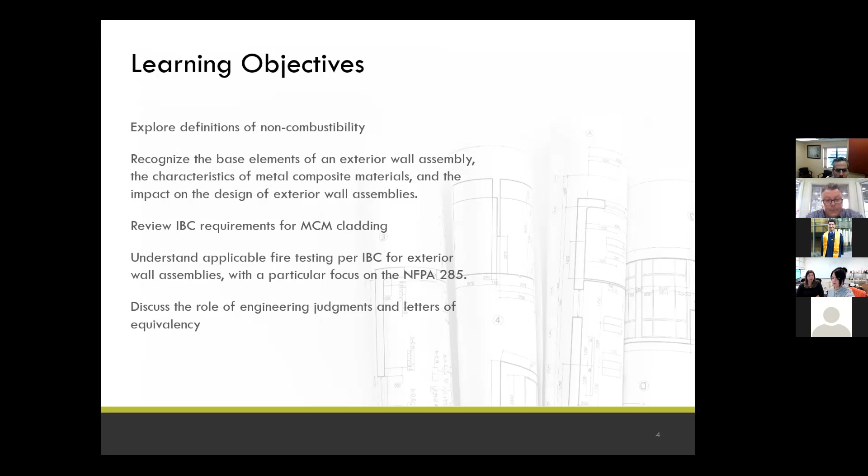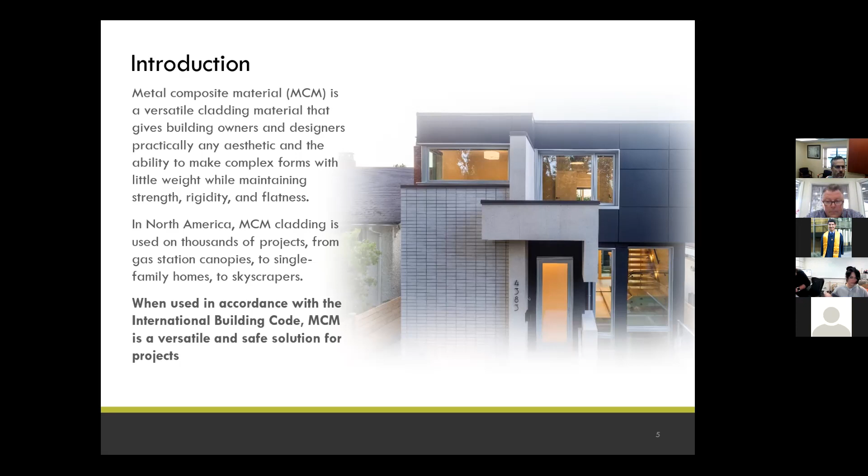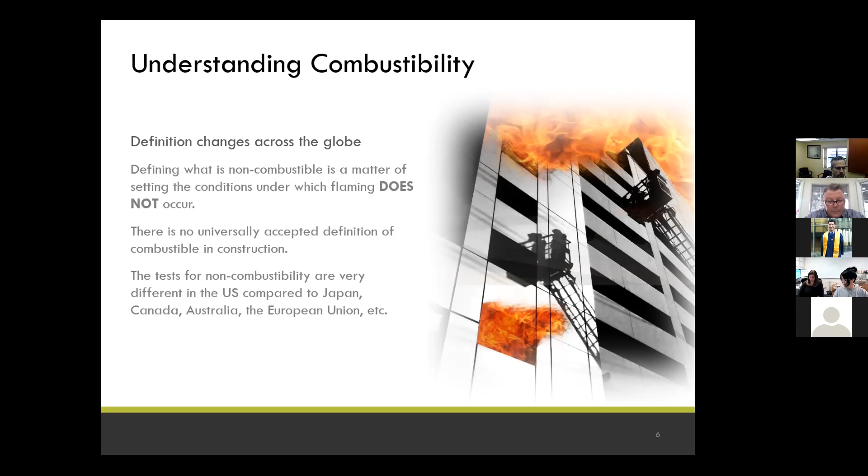So here in the US, like I said, we define non-combustibility, we define which flaming does not occur. The definition of non-combustible changes from country to country—this is very important to remember. Our building codes here in the US are much different than those of our friends up in Canada, the European Union, Australia, Japan, and so on.

So what is combustibility? Combustibility is about flaming, mass loss, and temperature rise. Non-combustibility is defined as less than 50% mass loss, less than 54 degrees Fahrenheit temperature increase, and no flaming beyond the first 30 seconds. If your material meets them, then it is non-combustible. There are a few tests, including the ASTM E136 test, which is done in a vertical oven at 750 degrees centigrade.

The same oven is used in Canada. A combustible material in the US can be classified as non-combustible in Canada, or vice versa. So that's something very important to note - something can be classified as non-combustible in Canada, but combustible here in the US. US and Canada set limits on these criteria and use that to determine what is non-combustible material.

Now, non-combustibility, as we read here in the US International Building Code, test ASTM E136, considers the material non-combustible if it has less than 50% mass loss, a temperature increase of less than 54 degrees with no flaming beyond the first 30 seconds, in an oven set to 750 degrees centigrade.

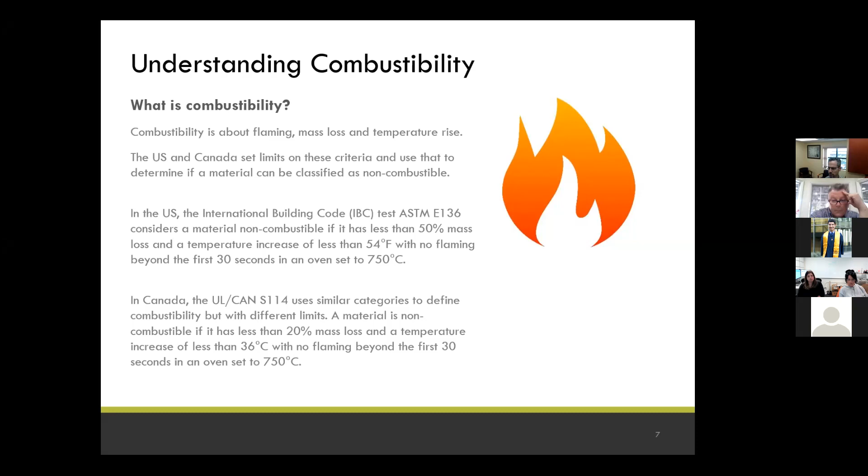And then our friends up in Canada have their own test and their own limits. Now, if the final product is a composite, which we're talking about, all materials must be tested separately and pass. In the case of MCM, it includes the skin, the core, and adhesives if used.

Obviously we don't use any adhesives at ALPOLIC, but some manufacturers out there do. Now, what is MCM? MCM is metal composite material. In that MCM realm you have your ACM, your TCM, your CCM, your ZCM - zinc composite, stainless steel composite. How is it produced?

For those of you who are unaware, it's produced by the continuous bonding of two of the same or similar metal skins under heat, pressure, and tension to either side of a thermoplastic core. This thermoplastic core allows for the uniform expansion and contraction of both metal skins, ensuring thermal stability, keeping the material very flat, and ensuring product performance.

So there are some really important words in this first paragraph. The first one is continuous bonding. This allows for the same consistent pressure, heat, tension, and paint when we are manufacturing the material. So continuous - very important - bonded under heat, pressure, and tension.

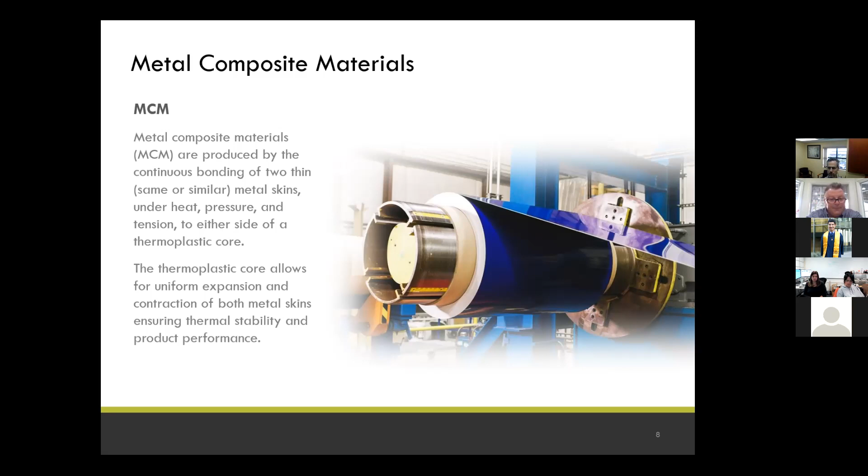This is going to ensure that the skins, whether it's aluminum, titanium, copper, zinc, or stainless steel, are bonded tight to the core. You're not going to have any delamination, no oil canning, and whatnot. And then the thermoplastic core - this is the most important part here - it keeps the material very, very flat, as we all know.

Now, as I just talked about, in that MCM realm you have your stainless, titanium, copper, zinc. It offers rigidity, superior flatness, and thermal stability of heavy gauge sheet metal. And we'll see too in our AIA #1 presentation, we have a little diagram - it's over 61% lighter than solid heavy gauge sheet metal. 4 mm material has excellent strength to weight ratio, is pre-finished, flexible, lightweight, can be prefabricated or curved, used on all different sorts of material.

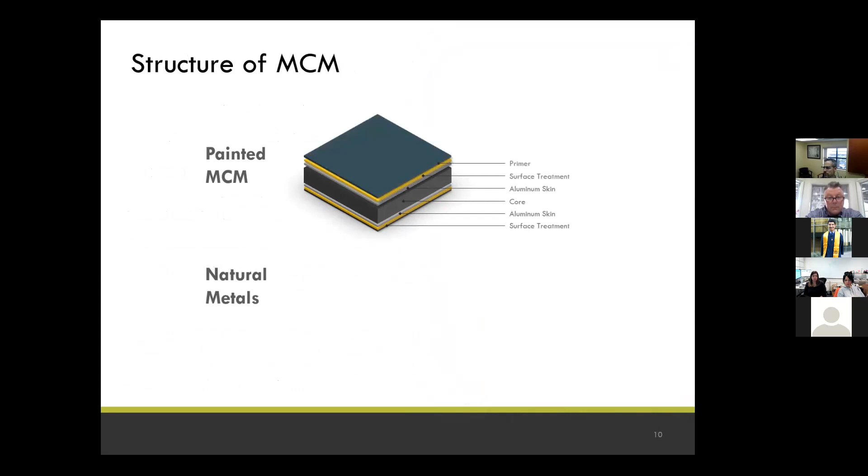Here's the structure of MCM. I'll quickly go over this. Your painted MCM has a surface treatment, aluminum skins bonded to that core, surface treatment on top, primer, color coat, and clear coat if needed. And then natural metals - there is no finish on natural metals, so there's not going to be a finished warranty. It's just the natural metals bonded to that core.

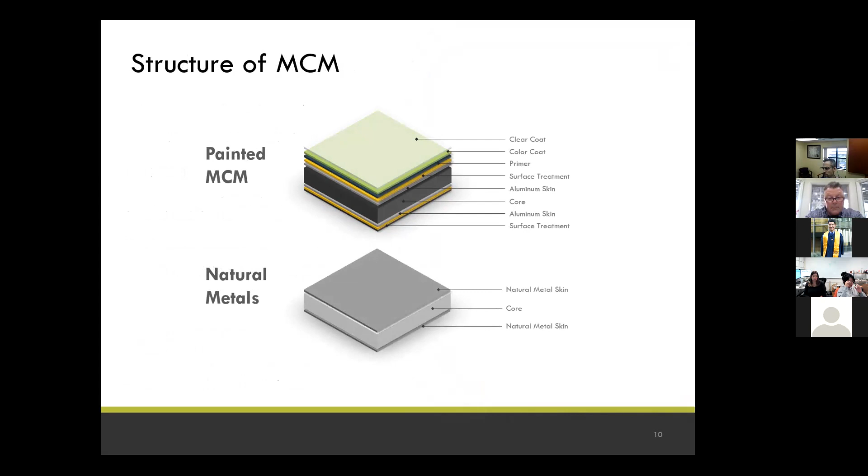Now, the types of cores. Very important to note, there are two different types of cores available in the industry: PE core, polyethylene core, and FR core, fire resistant, fire retardant core. Now, as we read here, both cores are regulated by the IBC and can be rated Class A under the ASTM E84 and Canada's ULC S102 test.

PE is roughly 2/3 the weight of FR per IBC. PE can be used on an elevation below 40 feet. FR must be used on anything 40 feet or above. I know at Walters and Wolf we love FR core, try to stay away from PE core, so that's perfectly fine. Now, FR material has been used as a component in wall assemblies that have successfully passed the NFPA 285 and Canada's ULC S134 test. Basically, the FR core is achieved by adding a high percentage of mineral fill.

The FR core suppresses fire by releasing steam from its water-based, mineral-filled core - basically the ATH, aluminum trihydroxide. And let's follow the code: anything above 40 feet, FR core must be used, and PE core can be used on elevations below 40 feet.

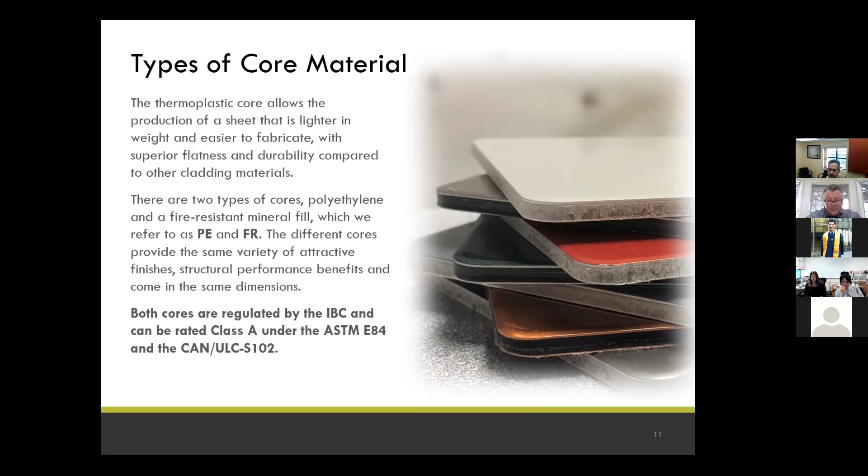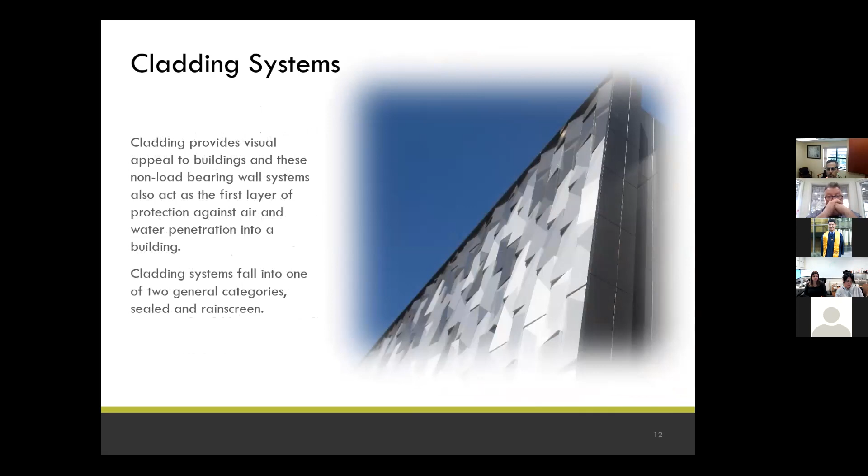Cladding systems - we have various cladding systems available in the industry, like our rain screens, our dry seal and wet seal systems. Not only do they bring a visual aesthetic, but they also act as the first layer of protection against air and water penetration into a building. I like to say rain screen systems let the building breathe, and sealed systems like wet seal and dry seal act as the building's main waterproofing. So we'll take a look at the systems here.

We have our first sealed system, our wet seal system, which is going to be most economical. It's an open joint system sealed with caulk, backer rod, watertight. It's important to note that the caulk or sealant on the wet seal will need to be replaced every 5 to 10 years if exposed to heavy UV radiation. It will collect dust, it will collect dirt. You may see it stream down the panel when it rains. So that's something to definitely keep in mind when working with a wet seal system.

Air and water do not go through, so it's going to be your waterproofing of your building.

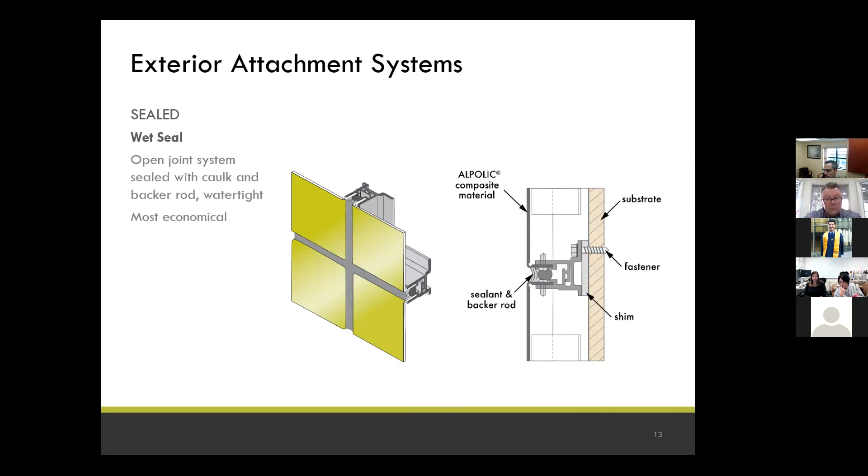Now for your dry seal, it's going to look very similar to your typical rain screen system. Usually it's going to have about a 1/2 inch gap from joint to joint. It's going to be an open joint system with gaskets, filler strip. It's going to be your watertight system, and typically most expensive, depending on what fabricator has it. We know Elward has their own dry seal system. It's really just dependent on the typical fabricator installer. Your dry seal system is going to have about a 1/2 inch gap from joint to joint, very similar to your rain screen. Costly system and labor intensive.

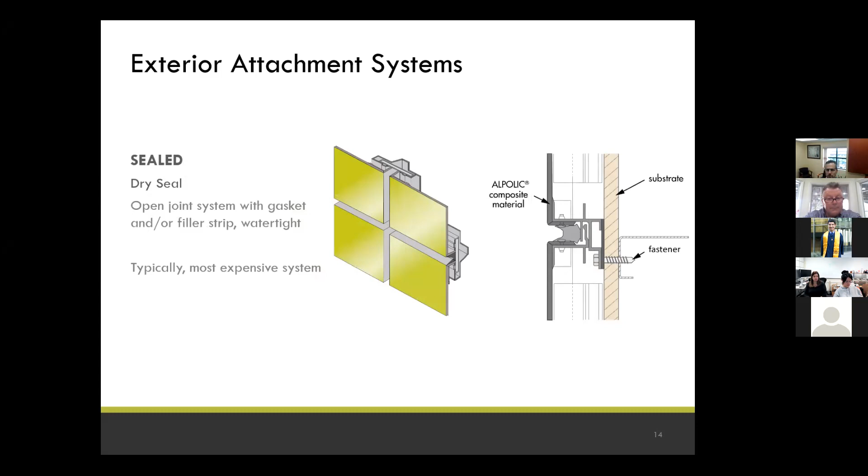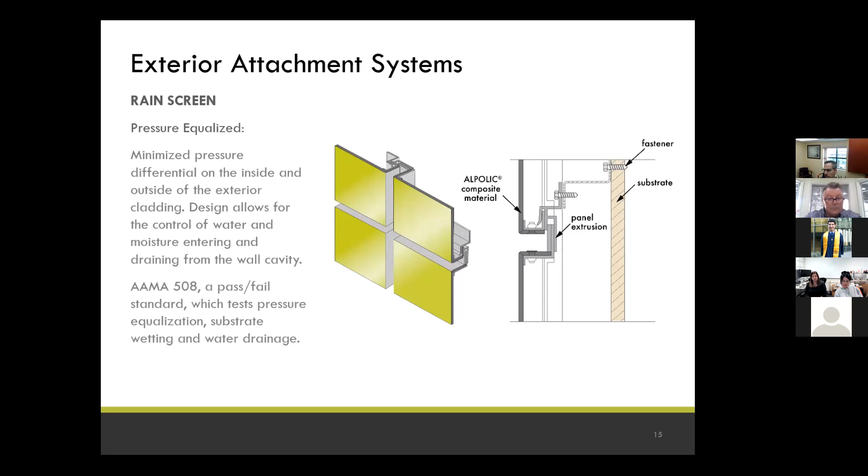Now, our 2 different flavors of rain screens. We have our pressure equalized, which is the AAMA 508 tested system, and then we have our drain back ventilated, AAMA 509 tested system. The pressure equalized AAMA 508 goes through a very rigorous test. It's a pass-fail test. There is going to be an allowable amount of moisture to get behind the panels onto the water vapor barrier, dependent on the test. The drain back ventilated goes through a similar test, but it's rated on a scale through 1 to 10. So your AAMA 508 is going to go through a much more rigorous test compared to your AAMA 509 drain back.

But your drain back, scale 1 to 10 like I said, rain screen systems do not rely on a single face seal approach.

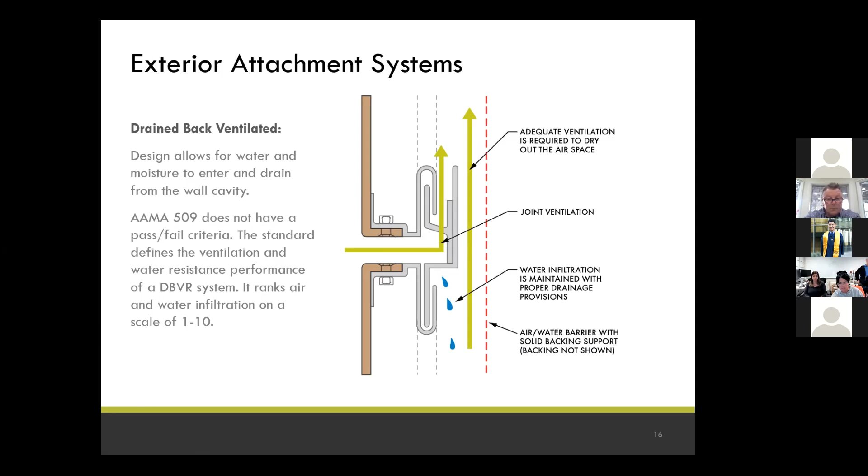Do we have a question? Nope, I guess not. All right, no worries. I didn't hear anyone ask a question, but I did have, I was gonna just briefly ask, I'm hoping that there's a good portion of this that focuses on the NFPA stuff. Yeah, so why don't I need to, should I just go? Okay, if you don't mind. Yeah, and then we can, if we have time, we can backtrack to this. Okay, yeah, no worries, I appreciate that. I'm so sorry. Yeah, thank you.

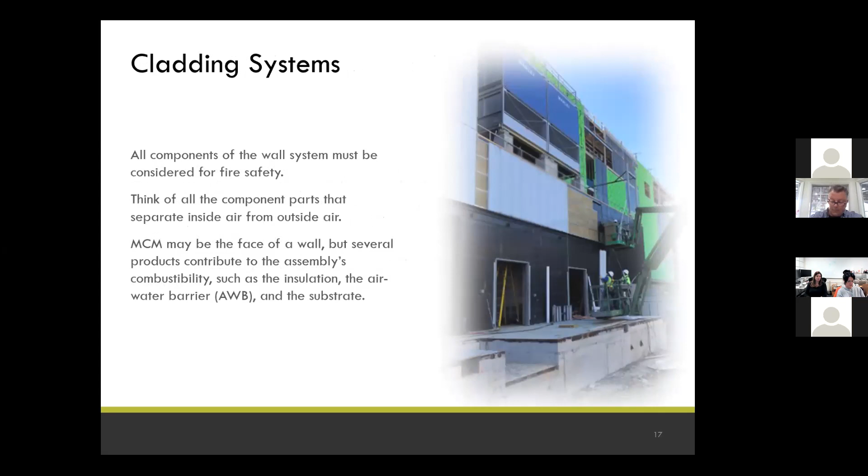No worries, okay, so we're on cladding systems. Components of the wall system include cladding, barrier, studs, insulation, substrate, etc. The only insulation that we're aware of that passes the NFPA 285 with MCM are mineral wool, polyiso, and phenolic. Often, insulation is the most combustible part of the wall. Simply, there is a trade-off between an insulation's energy efficiency and fire performance. In the case of insulation, a greener building material may be more combustible. As we read here, all insulation used in MCM cladding should be tested per NFPA 285 for fire performance.

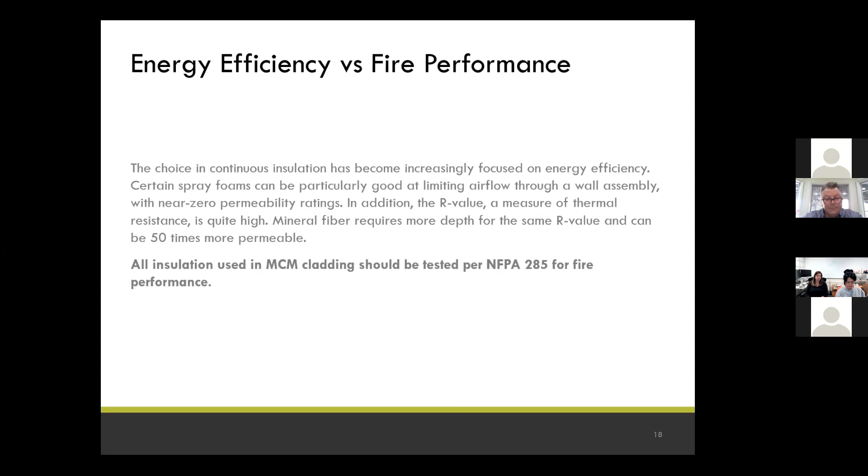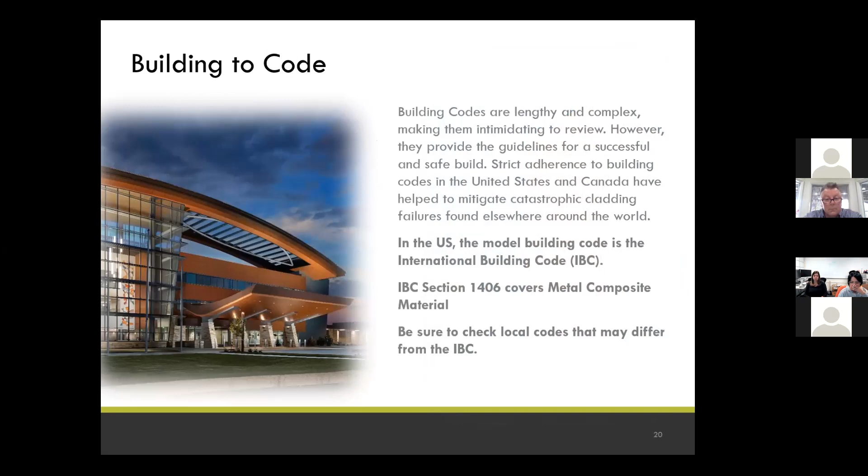No construction is without risk, but the building codes lay out allowable procedures to mitigate that risk. For testing, building code IBC section 1406 covers MCM. The 40 foot exception was incorporated into section 1406.10. Now, when we get into testing, you have the ASTM E136 test, which is the standard test method for assessing combustibility of materials using a vertical tube furnace at 750 degrees centigrade. It's important to note that no MCM passes this E136 test because MCM is combustible.

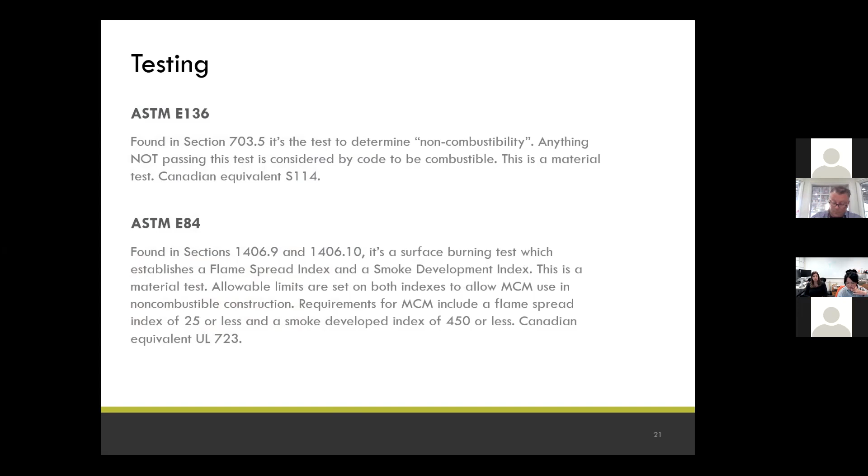Basically, think of the ASTM E136 test as a core test, and then you have your ASTM E84 test, which you can think of as a sheet test. It's basically the standard test method for surface burning characteristics of building materials. Both the PE and FR core meet ASTM E84, but no MCM in the US passes the E136, like I just said. ASTM E136 test is for the core, and NFPA 285 is for the composite wall assembly. For MCM to be non-combustible, both the ASTM E136 and NFPA 285 need to be passed. The code requirements require an MCM rated ASTM E84 Class A material.

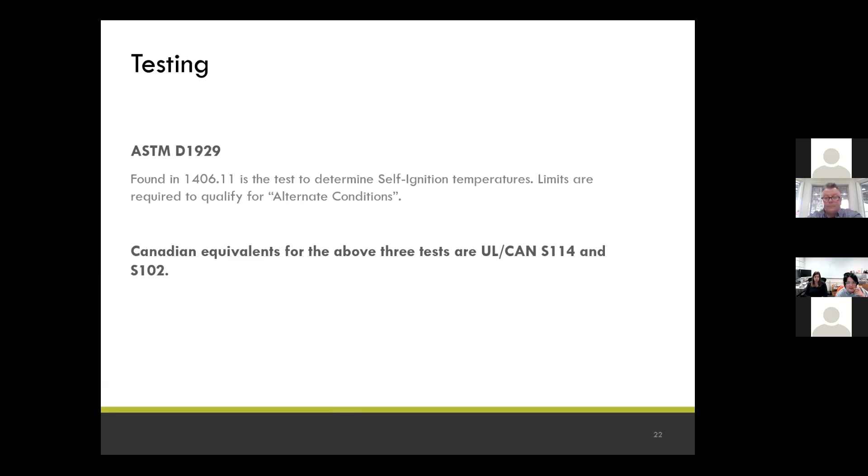ASTM D1929, standard test method for determining ignition temperatures of plastics, is found in section 1406.11.

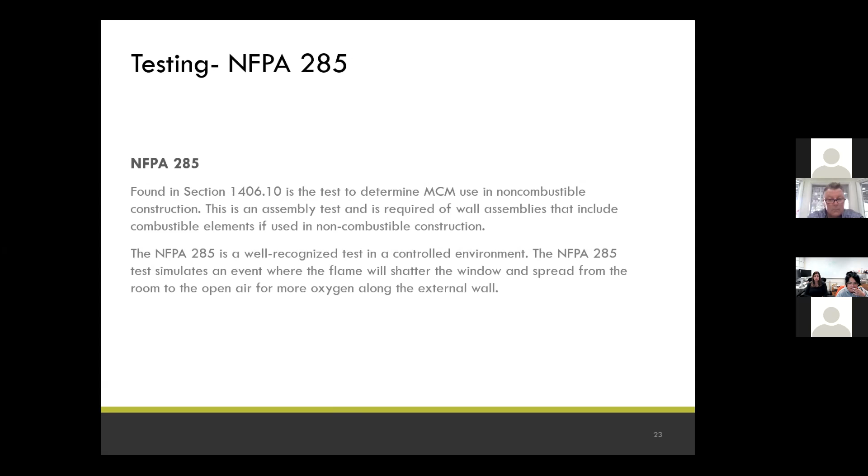Now talking about NFPA 285, found in section 1406.10. It is the standard fire test method for evaluation of fire propagation characteristics of exterior non-load-bearing wall assemblies containing combustible components. It's been around for more than 40 years, which increases the consistency and safety of the test. It's a real-world sample for fire tests with a realistic level of difficulty. The test simulates an event where the flame shatters the window and spreads from the room to the open air for more oxygen along the external wall. Material rated Class A in the ASTM E84 will not inherently pass the NFPA 285 as part of the assembly, so that's something to keep in mind.

Here are the changes to the NFPA 285 test. In 1998, the first edition; 2019, the most recent. In the 2019 edition, the core did not change, but the wall system did. So in the next year or two, another revision is expected, which will be more strict.

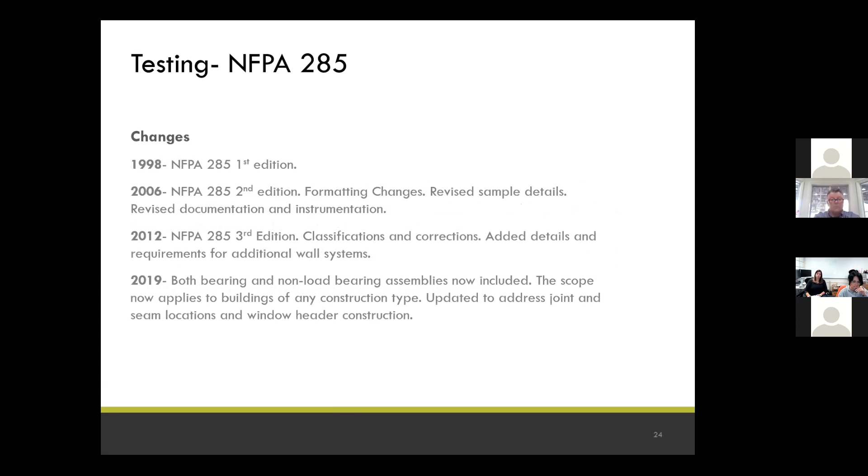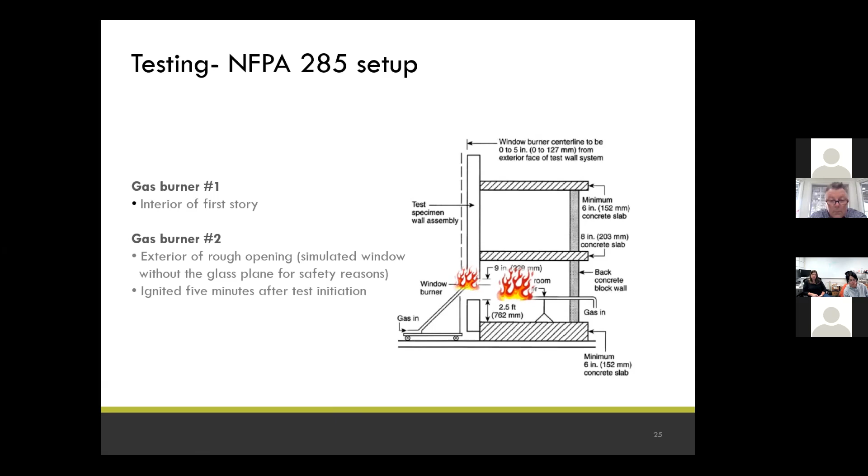If the flame does not reach the second floor during the test time, the material passes. There are thermocouple sensors throughout the test that can't get above 1000 degrees Fahrenheit. If they do, the test fails.

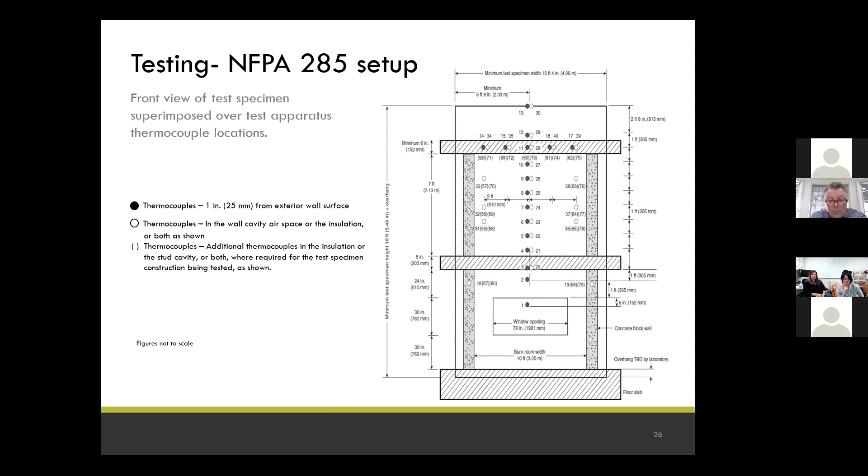Here's the front view of the NFPA 285 test. The test requires a center vertical joint, with no tolerance to one side or the other, and a horizontal joint about 3 feet above the window.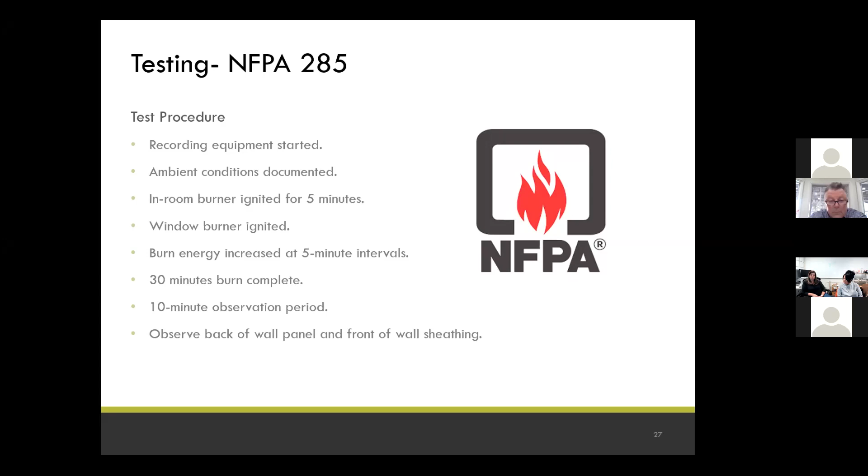Test procedure: recording equipment started, ambient conditions documented, in-room burner ignited for the first 5 minutes, then the window burner ignited, with burn energy increasing at 5-minute intervals. It's a 30-minute test, and after that, a 10-minute observation period, during which you also observe the back of the wall panel and front of the wall sheathing.

Passing temperature at 10 feet above the opening should not exceed 1000 degrees Fahrenheit. As you can see, the flame is burning off that aluminum skin, and now that FR core, the water-based inorganic minerals, once it gets to about 375 degrees, starts to release steam. That's some cool technology in the FR core.

You have vertical flame propagation of components — insulation shall not occur. Horizontal flame propagation of components — insulation shall not occur. Temperature rise in the second story shall not exceed 500 degrees. No flame in the second story, no flame beyond the intersection of the test sample and test apparatus.

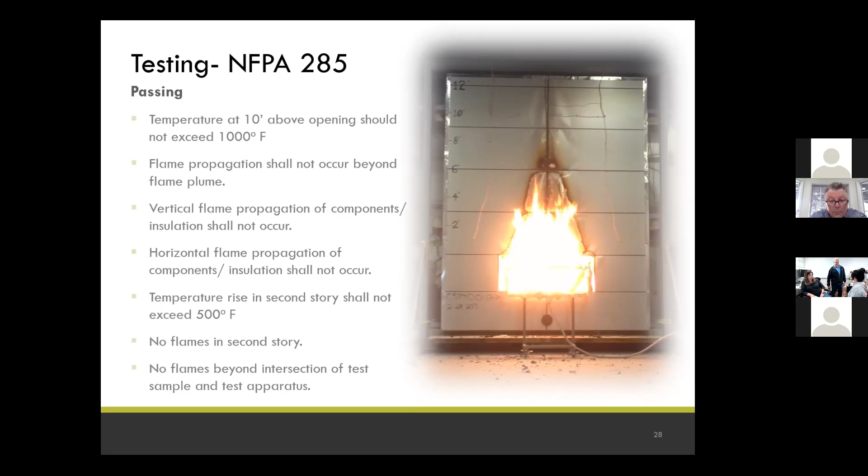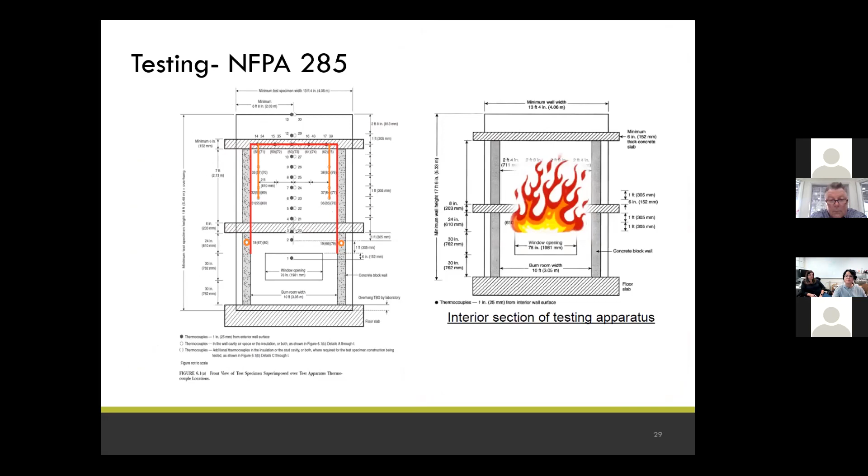This is simply to illustrate the NFPA 285 setup and thermocouple placements.

Here are some examples after the NFPA test has been completed. You see the aluminum skins being burned, showing that FR core. The FR core really releases steam. You're not seeing delamination here — you're seeing steam being released.

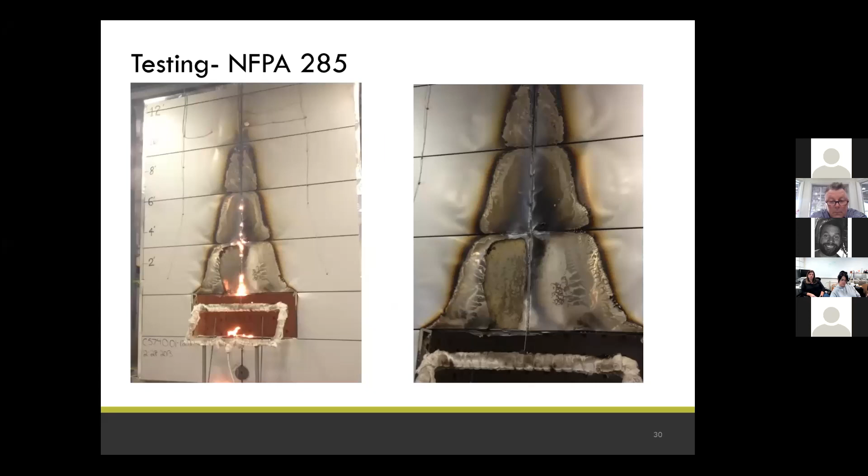So Mark, is that the big difference between the FR core and the PE core? Correct. The FR core allows the steam to go out, so it doesn't just encapsulate the heat and the fire? Exactly, Steve, that's the big difference there. Okay, thanks. Yep.

Some more examples. Now here's NFPA 285 again. Like I said, it's a 30-minute test on a 14 by 18 foot mock-up. It's not just an assembly test, it's a whole wall test, as we can see here on the right.

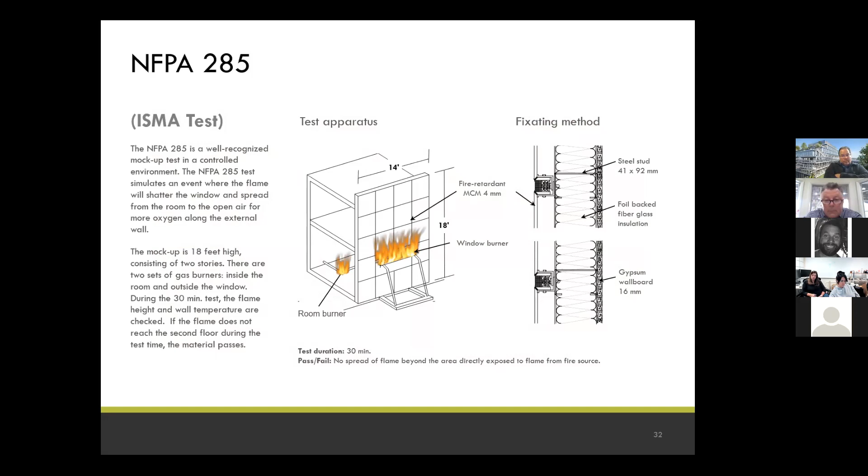Whole wall test — you're testing everything from the inside wall to the outside wall, inside wall to the outside cladding. There's a flame on the inside of the room that burns for about 5 minutes, and then a flame on the outside of the building that burns for the next 25 minutes, looking for flame spread and smoke generation.

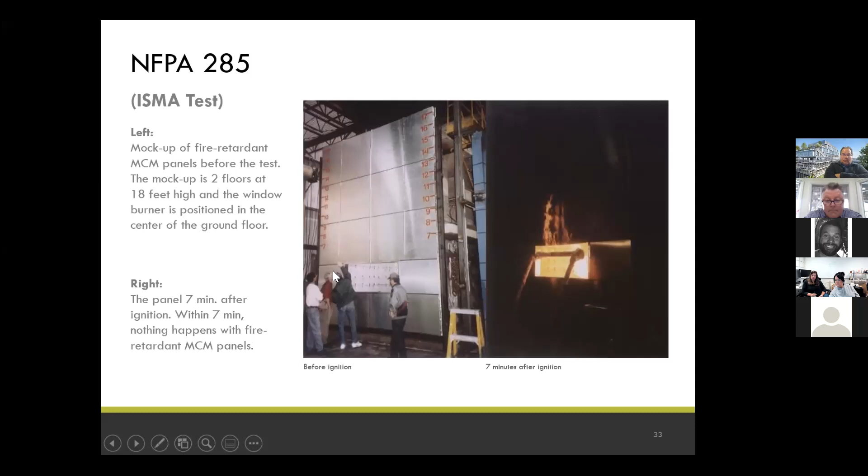Before ignition, then 7 minutes in, notice the length of the flame here. At 15 minutes in, you're not seeing delamination — you're seeing that water-based inorganic minerals releasing steam.

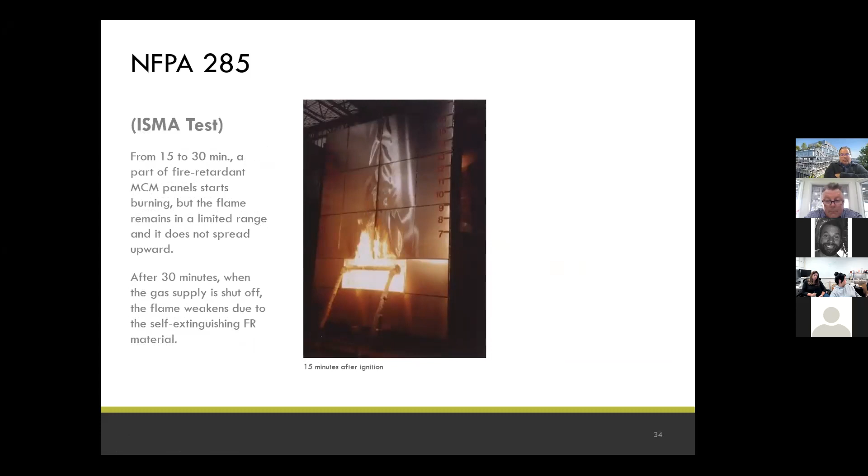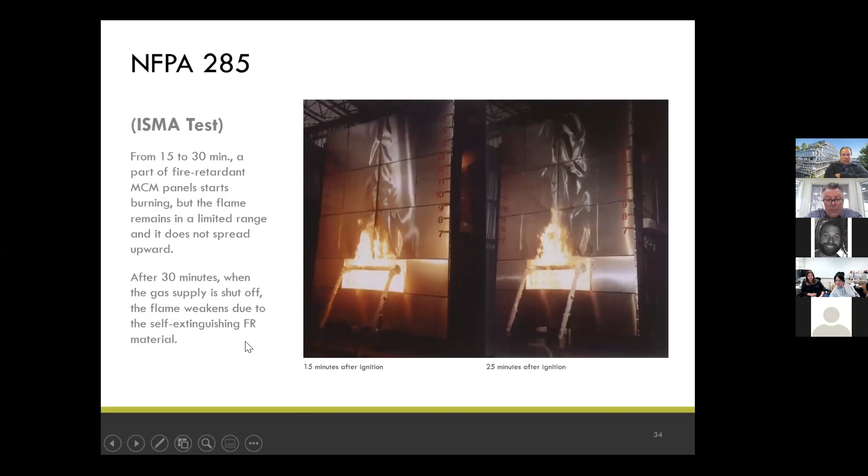Our friends up north have their own test: the ULC S134 test, which obviously is not in the code here in the United States.

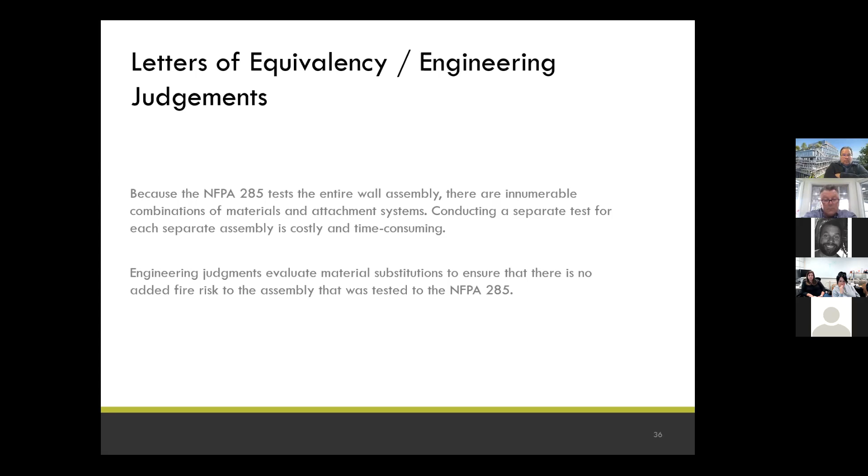Now, letters of equivalency and engineering judgments. Engineering judgments evaluate material substitutions to ensure there is no added fire risk to the assembly that was tested to the NFPA 285. Bear in mind, building officials or the authority having jurisdiction may have more stringent requirements than what is laid out in the code. Some parameters to be reviewed are: cavity depth, types of insulation, types of weather-resistive barriers, sheathing, mounting, extrusions, support system, even the paint being used.

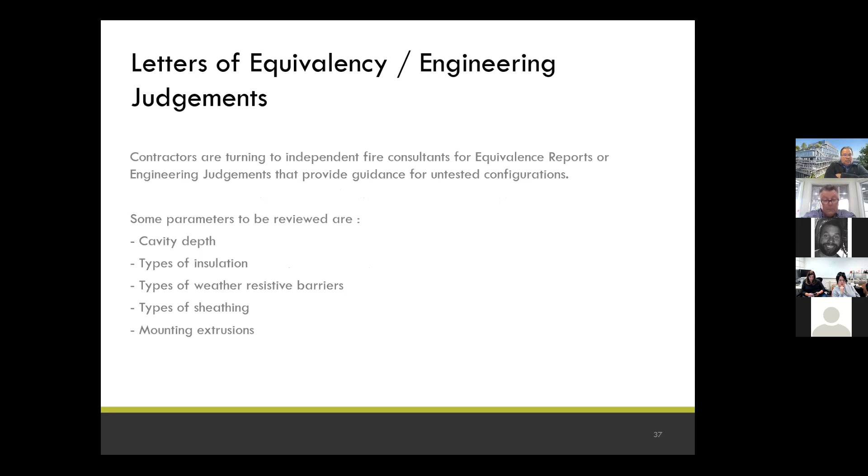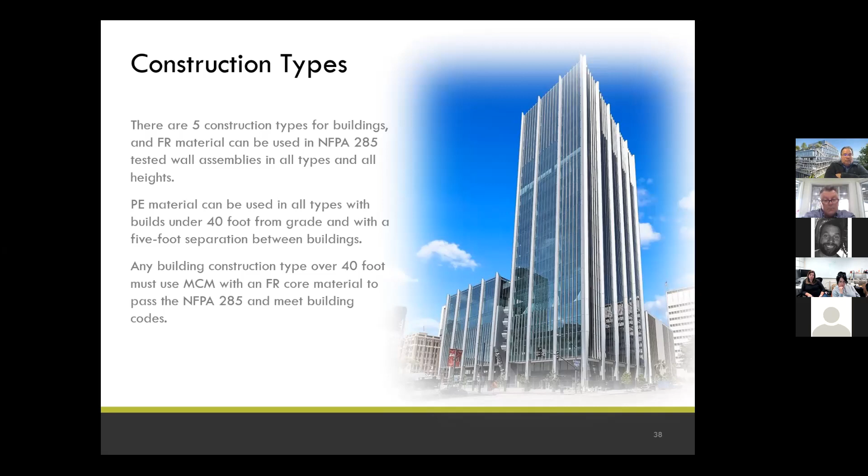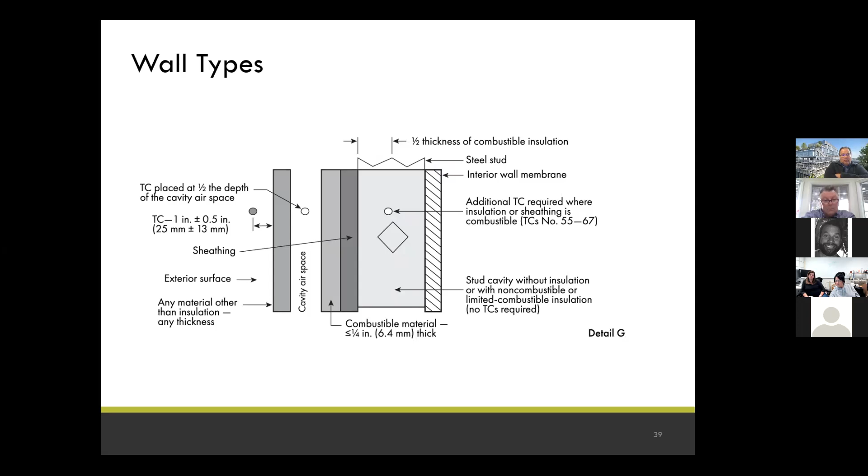Wall types. This just shows the thermocouple placements in a typical wall, which uses a separate substrate, air, water, vapor barrier, and continuous insulation. And on slide 40, we basically just show a wall with a combined substrate, air, water barrier, and typically a polyiso such as RMAX.

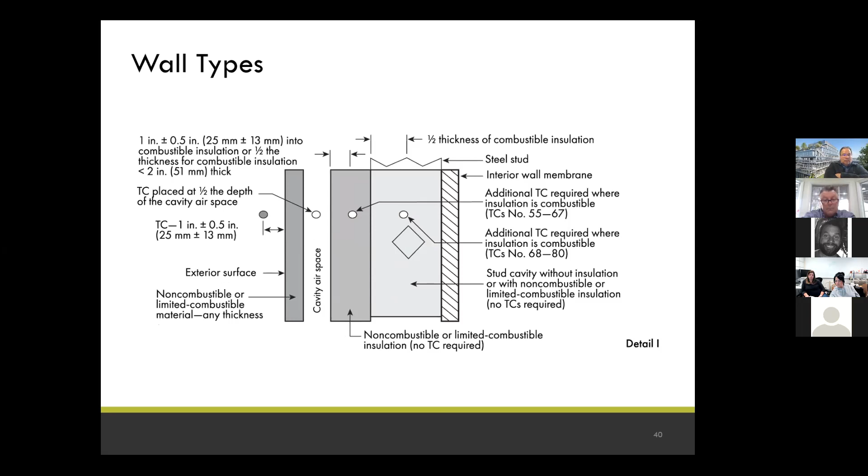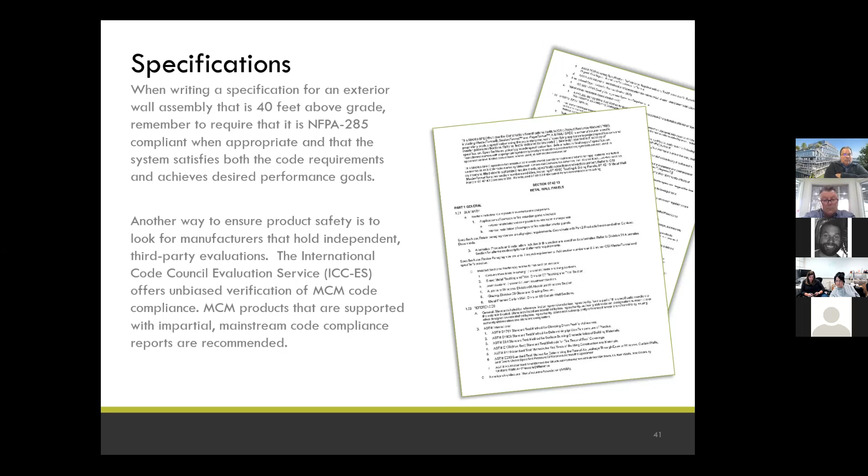And in conclusion, that does it. Follow the code. That's really what I want to touch on. It's important to distinguish the resiliency of the US and Canadian code because of the robust standards and the attentive examination of both the building construction and fire requirements. Wall cladding featuring MCM for over 40 feet from grade must use a fire-resistant core and be fabricated in an assembly that can pass the NFPA 285.

And ladies and gentlemen, that does it. Do we have any questions?

I just want to reiterate the composite panel, even the fire rated, does not meet the NFPA in a curtain wall system because it has not been tested as an assembly. Exactly.

But yeah, if you had a stud wall or sheathing, then in that case it would be able to pass, correct? But if you don't have that, right, it's basically what the test has been set up for. There hasn't been a test for curtain wall, so if Walters and Wolf wants to be the guinea pig for that test, we can certainly get you with management and we can set that up. It's going to be expensive, but it's not out there. It's not available, and it would definitely help.

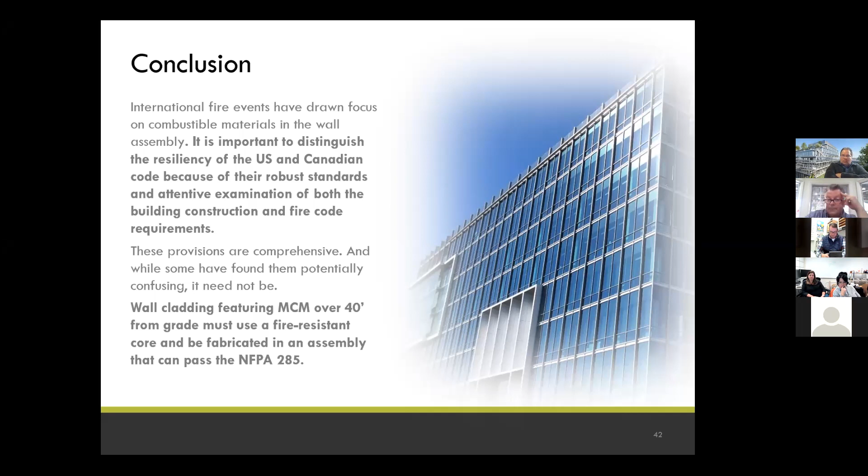Does anyone else have any questions or comments? I had a question—do you guys have examples of rated assemblies with these panels? We have a job coming up requiring a 1 hour rated exterior cladding with an FR core, and at 1mm it's not going to pass. That's a good question, I'm not too sure on that answer.

Okay, I will email you.

Thank you, Mark. From a scheduling standpoint, if you were to do a test, how long does it take to put the whole thing together? What's the typical duration? The cost is between 40 to 50 grand, and it takes about 2 to 4 months to schedule. For the UL test we did, that's the whole process for the fire example. So it can be done fairly quickly, maybe even sooner—it's just getting in line with the lab that has the ability.

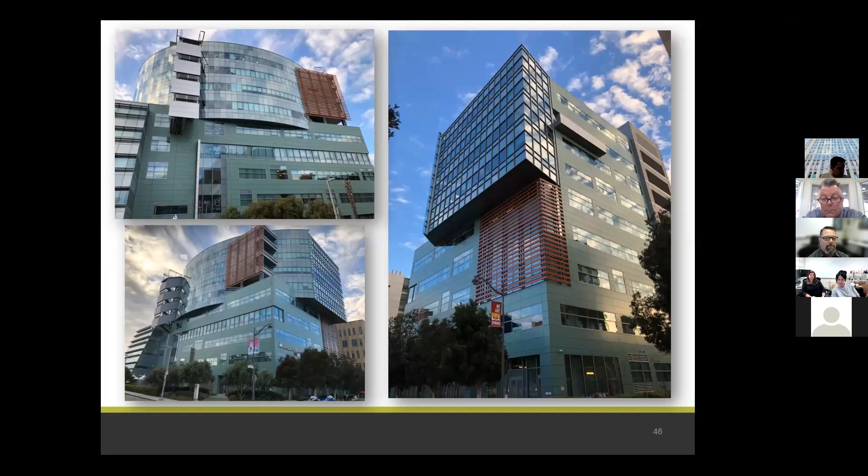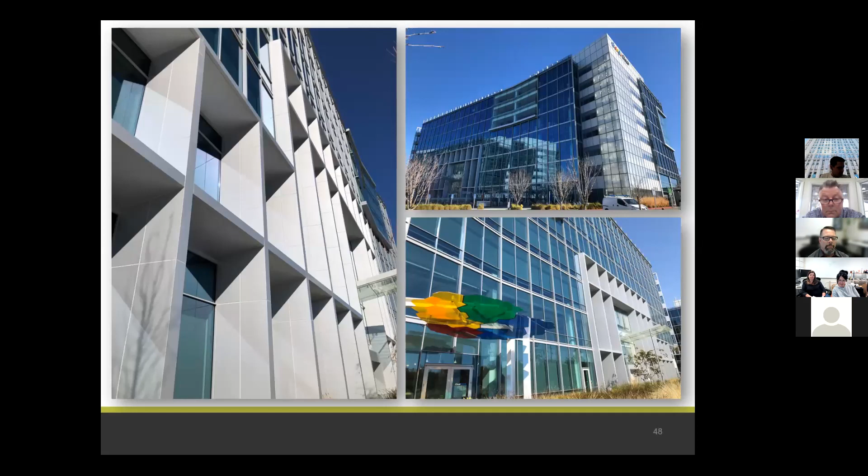Are you showing us jobs? Oh yeah, so here we have a few Walters and Wolf jobs. We have Kaiser Permanente Mission Bay—it looks beautiful. Moffett Place, Google Campus, this one's one of my favorites. This one screams California, you have the California poppies, you have Google, what else do you really need? You have the Google Event Center, 1255 Pear, and lastly one of my favorites, Natural Resources Building in Sacramento.

That's beautiful, even though I do not like this Alucobond down here. That wasn't us. I know it wasn't you, I know.

So do we have any other questions before we log off here? A few months ago, Mark, I emailed you about 751 Gateway—the architect was asking if there was a Class B flame spread rating, and you replied that we meet Class A, but I didn't see mention of different class ratings during the presentation. Is A just the best and you're good, or are there other variables that might come up? That's a good question, I'm not going to have that answer. Why don't we get that over to Jim, get it down in writing, and I'll get the answer for you tomorrow or later today.